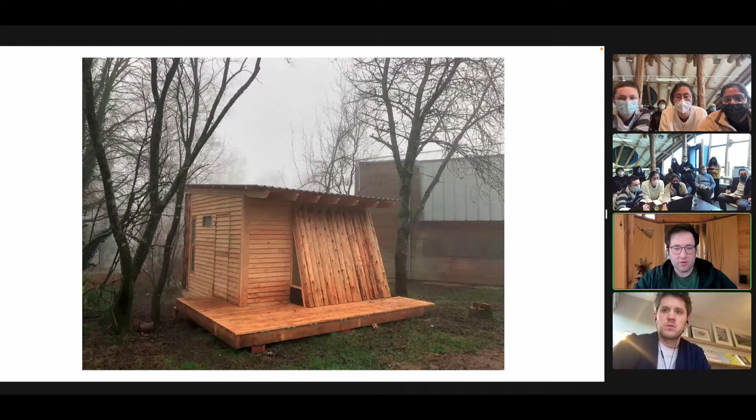We'd like to invite those of you joining us digitally to the place we have called home for the last year, the forest of Hooke Park. We'll be presenting yet another house of sorts that we built inside the campus. We'll begin by giving you an overview of the project, explaining our brief for a house and the systems we constructed in response. We'll then share a bit about the context for building houses that we've placed our project within, and of course, the forest.

We'll explain the major moments that influenced how these systems came to be, and then show just how we did it, accompanied by some videos of our process. We'd like to use this presentation to immerse you in our year designing a house from the forest, in the forest.

We received our brief one year ago to design a house from timber that specifically considers the commercial market. The intent was not so much a one-off bespoke assembly, but a consideration of the production of houses at large, rooted in the energy production as well as use, considering aspects of labor, economy, environment, and health.

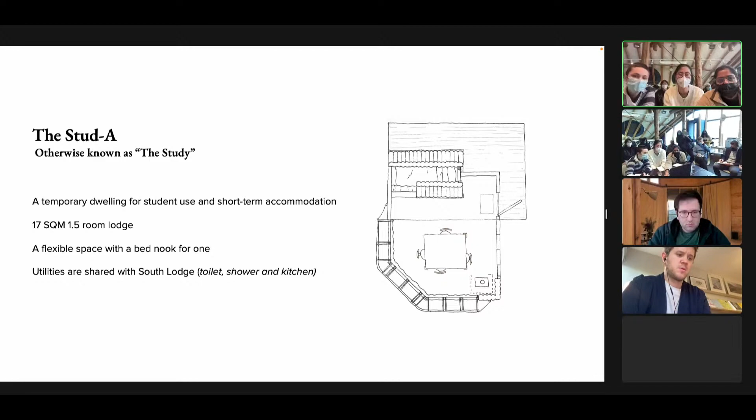The name Stud A is a play on the systems we've developed, an A-frame and studs, but it's also a gesture to its future as a continual site of investigation, a temporary dwelling for occasional short-term visitors, as well as a central campus shelter for daily studies.

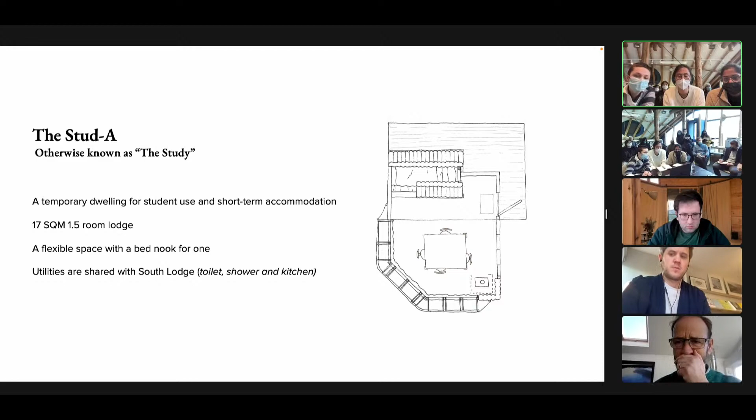The study is a 1.5 house of sorts with a cozy bed nook to sleep one. Utilities are shared with the neighbors in South Lodge, and as such, staying here is meant to be an experience that builds on community. We invite those spending time here to immerse themselves in the neighborhood of other student-made houses. We see the sharing of utilities as a catalyst for sharing and spending time together.

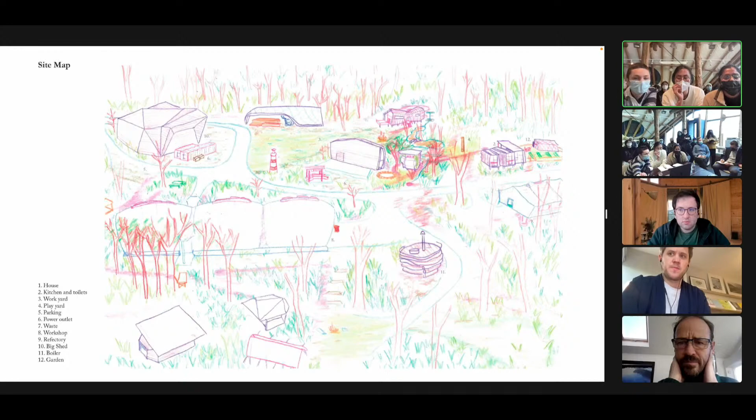The study is a house that synthesizes two unique systems that we each saw merit in their own right. The first, the core, is a mass timber assembly which provides a sheltered sleeping space in an A-frame and global structural stiffness. In balance with this is the Stud Plus, a light timber frame assembly that takes its explorations in the performance of the envelope.

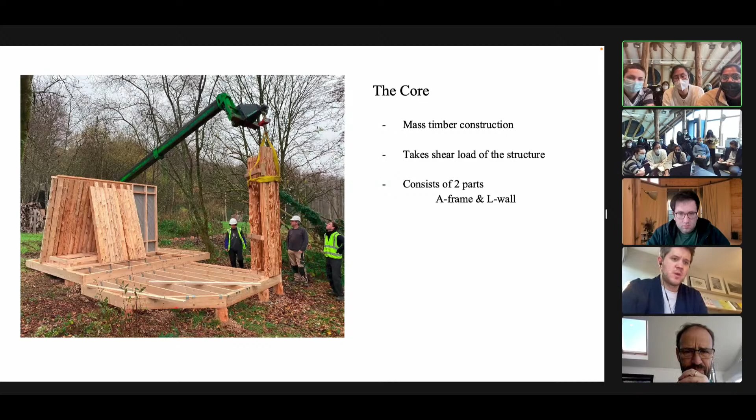The first system we're introducing is the core. The system is a mass assembly system that consists of two parts, being the A-frame and the L corner wall. These two systems are placed at opposite ends of the structure, resisting it in shear load. The core walls are an assembly of round timber procured from the forest. The A-frame was built using a cedar stack put aside to be wood chip, and the L corner wall was built with Douglas fir.

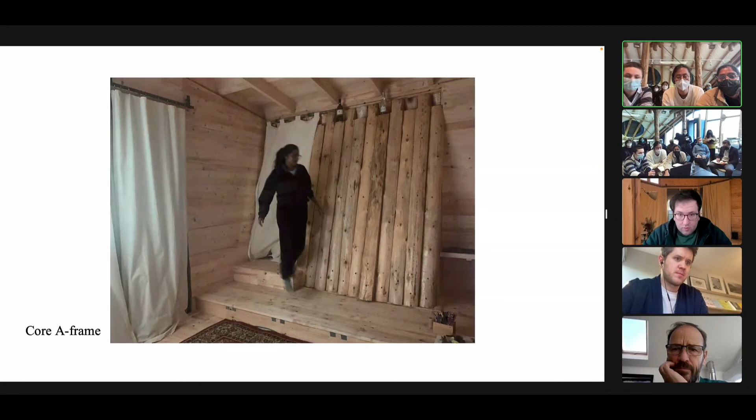The first half of the core system, the A-frame, is a bed nook. Taking advantage that the timber is a good thermal insulator, we decided to have the bed nook in it. The space inside is small enough to be about the size of a single-person tent, allowing it to capture body heat, and the triangular structure also provides less surface area, resulting in less loss of heat.

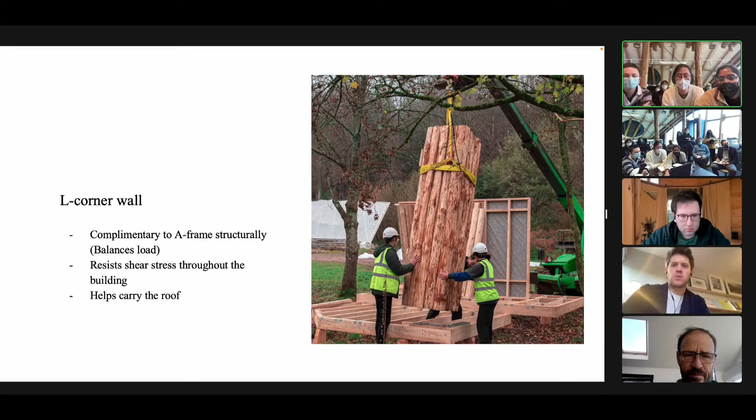The L wall, the second half of the core system, provides the balance with the A-frame within the whole structure. Its major role is to resist the shear load and also help carry the roof.

The Stud Plus is an additive take on its predecessor, the stud frame, also called light timber frame. It consists of two subsystems, one of framing and one of the envelope. Elements of the Stud Plus latch on the basic components of a more conventional stud frame.

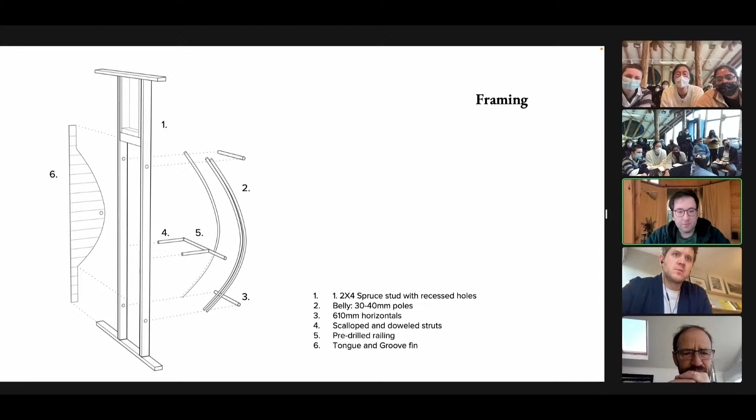The load-bearing structure itself was admittedly not ambitious, cut, finished, and assembled in 2 days by 2 people. But in seeking to address a need for commercial housing, we found the system a compellingly efficient use of time and material, so long as we promise to respect the forest in our design.

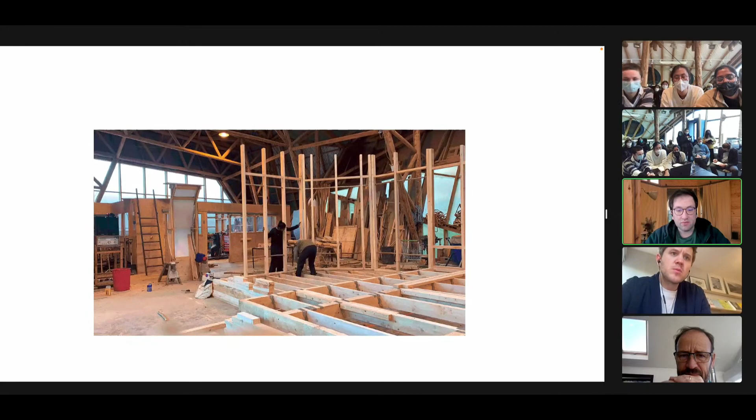The coppice is connected to the studs, avoiding the use of any metal joinery to increase the potential reuse value of each stud after the life of the building is complete. We used beech dowels combined with scalloping for the struts and lashing to fix the poles to the coppice struts.

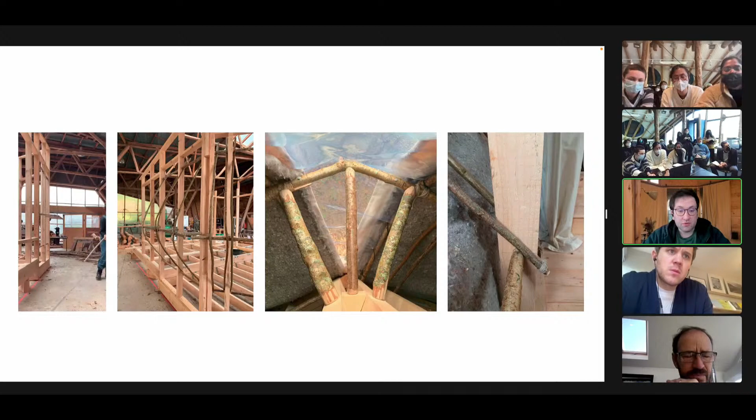We decided that the most effective way to clad the irregular geometry given by the use of coppice would have been a textile membrane. To increase the insulation value of the wall, a carpet underlay is sewn to the canvas following a mode similar to that of a yurt.

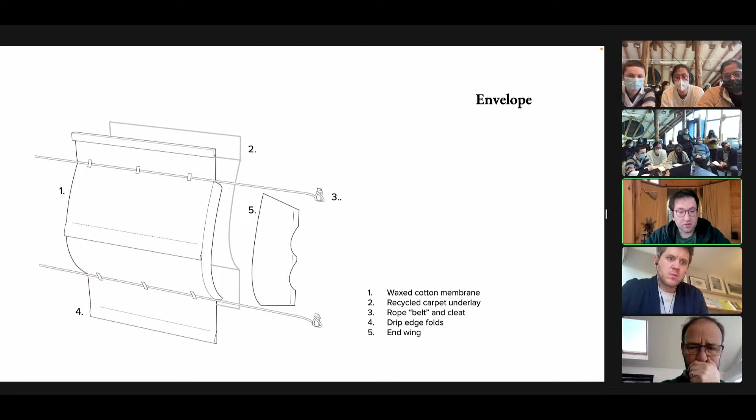Resolving the detailing of edges proved to be one of the most challenging aspects of the design of the Stud Plus envelope. Through the use of toggles and details borrowed from sailmaking, we resolved the seams with a rigid structure. To facilitate the shedding of water, a drip edge was achieved by sewing a flap halfway through the curvature of the wall.

The cabin is an emergent system in which the whole is greater than the sum of its parts. Though these two systems originated through separate beginnings, we quickly discovered that in conjunction, they solved many of each other's problems. The core provides a stable microclimate through scarcely processed roundwood, but using this assembly for the entire envelope would be an excessive use of timber and its performance.

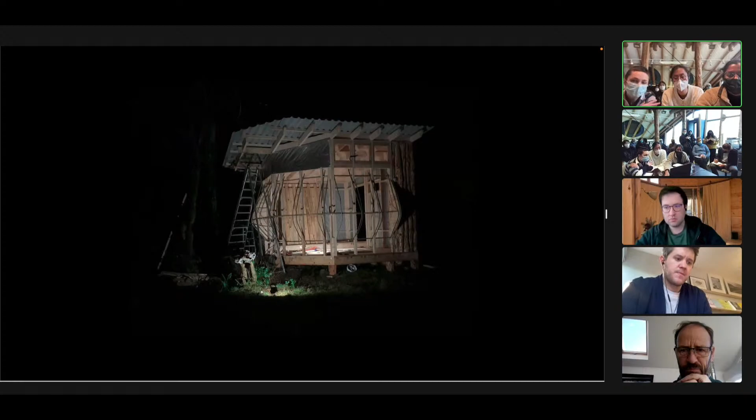So we've prepared this video to kind of put you into our house.

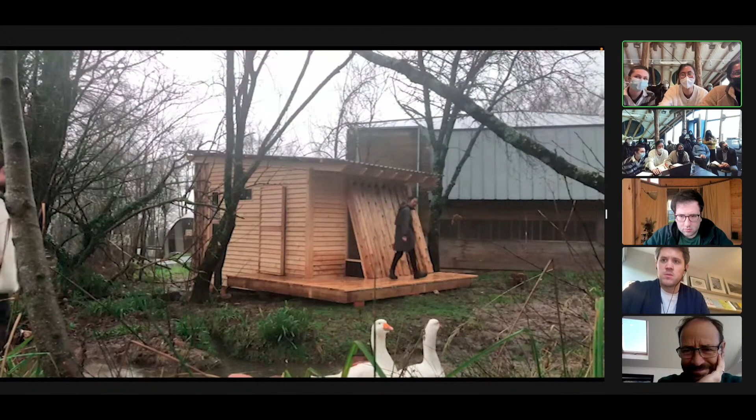In designing a home that would be applicable to the commercial market, we situated our brief in the current state of building and environment. The construction industry is responsible for nearly half of global carbon emissions, and half of that is just from heating buildings. While we have a great need to provide homes, we recognize the impacts that this has in contributing to waste and in importation of timber, where our ecosystems seem to bear the greatest burden of commercial supply chains.

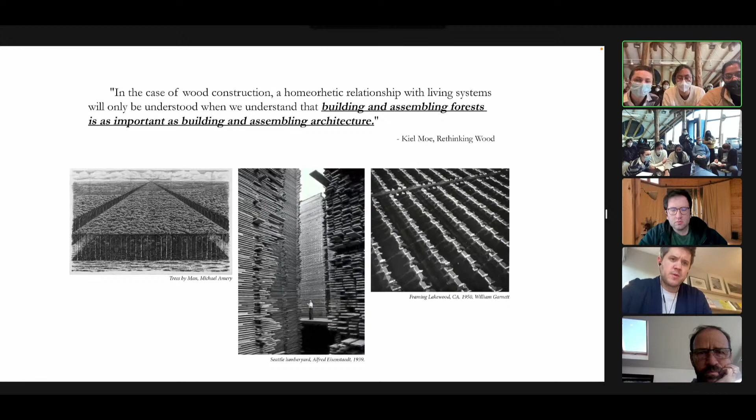We sought to not just design a house from the forest, but with the forest, considering how our systems might generate reciprocally beneficial relationships to the future of productive landscapes.

Our initial design research at the beginning of this journey tried to survey the different timber construction systems through a series of 4 case studies. The research encompassed a broad timescale, going from the Neolithic to some of the most recent developments. 4 categories emerged from the vast set of buildings we considered, each defined by a central structural approach.

We extracted one takeaway from each of these 4 cases. The indigenous longhouse from the tribes of the Amazon basin showed us a way in which you can build using a variety of species and interacting more fully with the forest.

The heavy frame, the barn, proved a different way to use joinery without metal fixings. The radical simplicity of the light frame proved the power of an open-ended and flexible system, and the mass timber showed us the true insulative potential of wood.

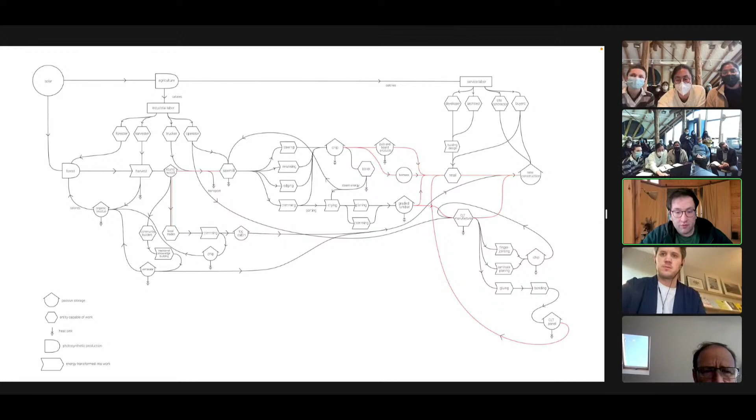The initial research phase allowed us to complete a map of a broader network of systems inside which a building exists. We tried to determine the flow of energy, both in terms of matter, carbon, and heat, that flow through the production of a timber house, trying to find which part could offer us the best opportunities to intervene.

Now I will introduce our forest. This is Hook Park, a forest of 17 species, which were planted into a compartment in 1950. In 2020, a compartment of spruce was clear-felled to produce a surplus of sawn timber beams. As a warm-up project to our program, we stacked these beams in a self-seasoning shelter.

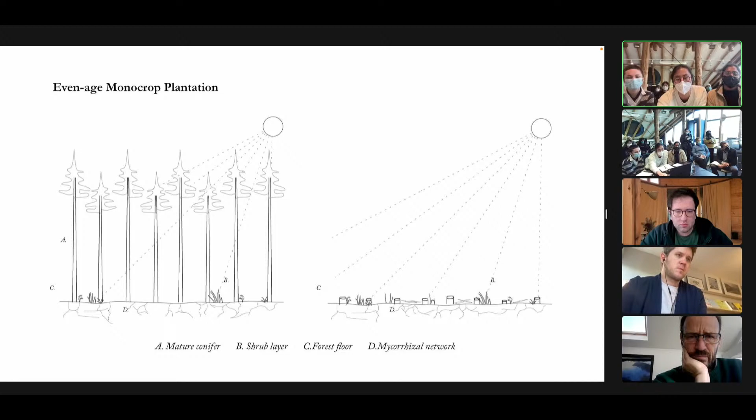This practice of clear felling is common in monocrop plantations, the kind of forestry management most often used for timber production. However, we recognize that these constructed landscapes privilege the profit of the forest, and by doing that, these forests suffer from a lack in biodiversity and resilience.

Coppice is a form of woodland management that takes advantage of most broadleaves' ability to re-sprout when cut. It makes up the understory of irregular forestry management, otherwise known as continuous cover forestry. We see this form of management as a complex, resilient, and biodiverse practice.

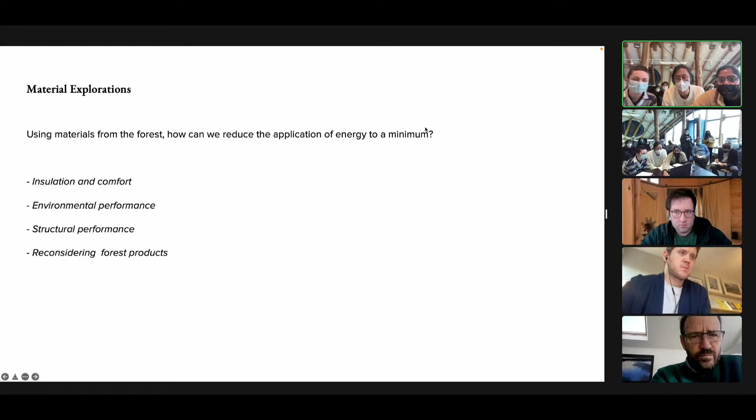And so in our building, we use this as a driver of materials. Using forest products as our material palette, we aim to produce prototypes using minimal application of energy. We took measurements depending on their insulative properties, environmental performance, structural performance, and finally reconsidering them as a forest product.

We experimented with neglected forest products, coppice and cedar bark, which are abundant in Hook Park. Seeing as coppice has a low economic value, we considered how to use it en masse as an insulative assembly.

The bark being so light yet fibrous, and looking at its history of use by the indigenous people of the Northwest, we considered it as a cladding material.

We produced mass and light assemblies majorly using coppice of various diameters. The mass assembly required excessive processing, while the light assemblies experimented with the flexibility of coppice.

Using the prototypes we wanted to continue exploring, we built an A-frame structure consisting of 3 different panels, each of 3 different properties.

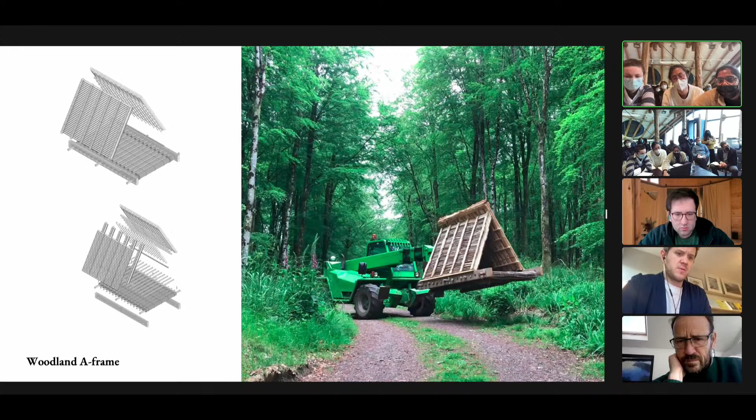Having learned from our research and hands-on investigation, we returned to our manifesto to begin designing potential systems. At this point, we'd like to take you through the origins and key moments in the development of our systems.

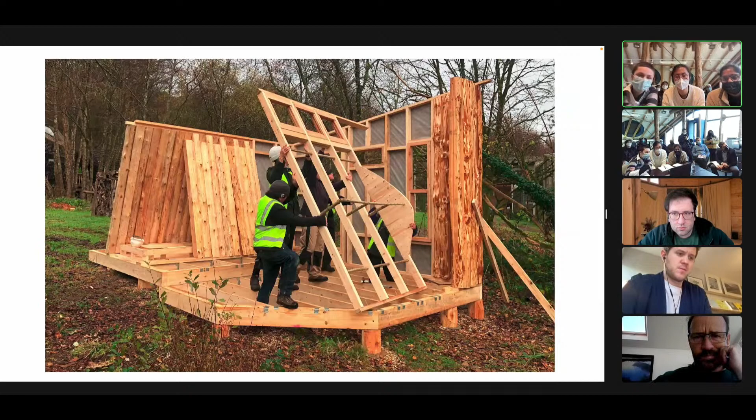First, why we built a stud frame in Hook Park. The light timber frame was first used in the early 19th century in what's called the balloon frame, and it hasn't changed much since. It's an open source assembly logic, and it's easy to follow, kind to low-skilled self-builders, and easily modified with just a few power tools and a pair of hands.

It's an incredibly efficient use of timber, needing only 15 trees for a single house, whereas a CLT house of the same size would require 3 times as much. Efficient as it is, the production of the 2x4 in respective houses has given way to economies of scale, implicating our most intimate spaces in mass commodity production.

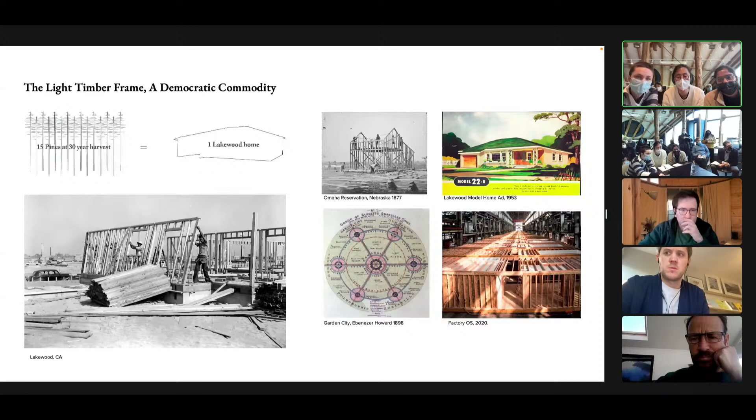Having lived in a stud frame suburbia all my life, I found it troubling that architectural education and the discipline at large are typically dismissive of the light timber frame. Familiar, elusive, and ominous, this case study helped to unravel the pervasive black box light timber frame industry which proliferates the residential landscape.

But perhaps the most alarming commodification in the system is that of the forest, where monoculture plantations are routinely cleared, with the only consideration being financial yield of its woody stuff called timber. In this way, the 2x4 becomes only a product at the end of a long supply chain, its origins from the potentially exuberant forest it grew from completely abstracted.

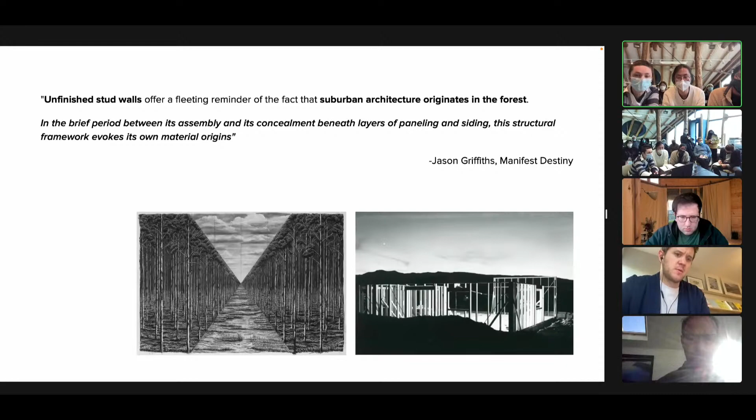Testing the system against our manifesto, it was not only an abstraction in how we build houses from forests, but also the lived experience in a house from a forest.

Virtually no timber is exposed here, and flat textured sheet goods conceal its innards of still air insulation. This points to what Kiel Moe refers to as an epistemological error by thoughtlessly deploying insulation as isolation, as though it were ever possible to truly isolate a building envelope from its dynamic environment.

The approach to Stud Plus is twofold: first, to make a stud with more depth to it, metaphorically and literally; second, to eliminate the need for plywood, exposing and celebrating the moments of the forest within this building. We aim to hijack the strength of the system while freeing it from its constraints.

True to the plus in its name, the development of the system was additive. We'll share some of the key moments that led to what we built, both failures and promises.

The first prototype was a crude assembly of green willow bent onto an L-shaped 2x4. The most interesting thing was the strawberry hue the willow turned when debarked, for a reason we never confirmed. The diameter of the willow was, however, too thick, bending the stud beyond structural use.

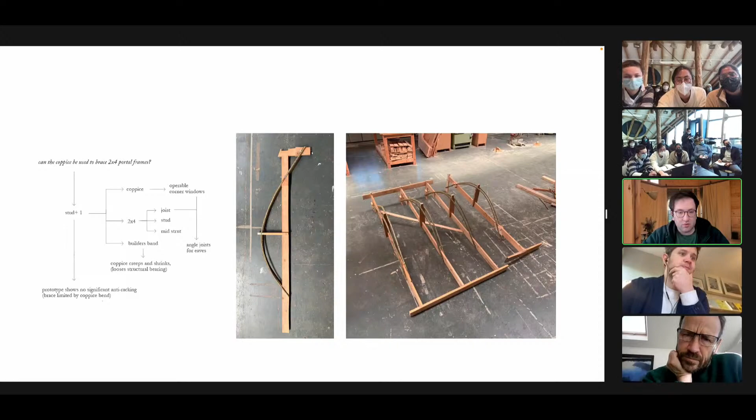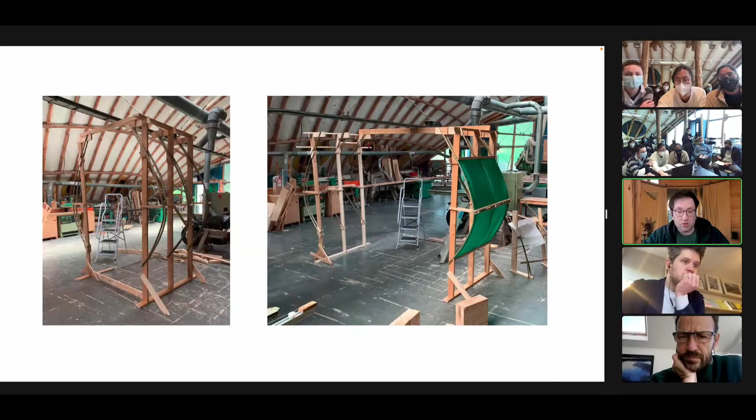The next iteration deployed two smaller hazel poles, which were much more pliable. We established strut and joist components as members to capture the hazel, testing panels as portal frames to see if a brace could offer racking resistance. Things were still pretty wobbly. With these panels built, we spanned a membrane across and understood how the tolerance of the coppice would perform, which was fairly promising.

Seeing a number of ways forward in the system, we looked to well-known housing types to imagine how it could be applied. Having assembled panels at this stage, we considered how a manufacturer would play into the supply chain to be both efficient and rooted in the forest.

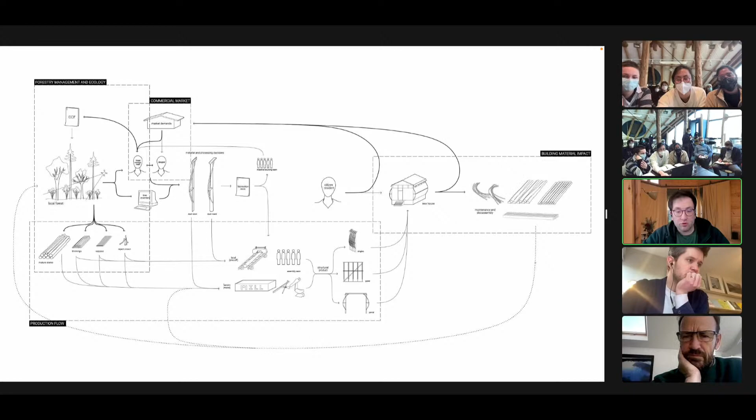We proposed a logic for a local supply chain that would more directly connect builders with the forester and eventual occupants. Since commercial markets fluctuate, we wanted to design a system less focused on mass production, considering times of lower demand.

We developed a more carefully crafted version of the Stud Plus using half-sawn and thin round studs. The prototypes were promising but would have required greater section for structural use, meaning cutting down more trees with a less efficient yield than the energy required to harvest one large tree.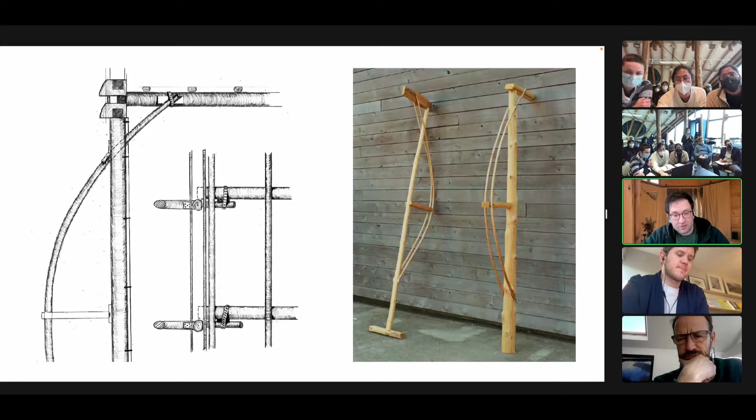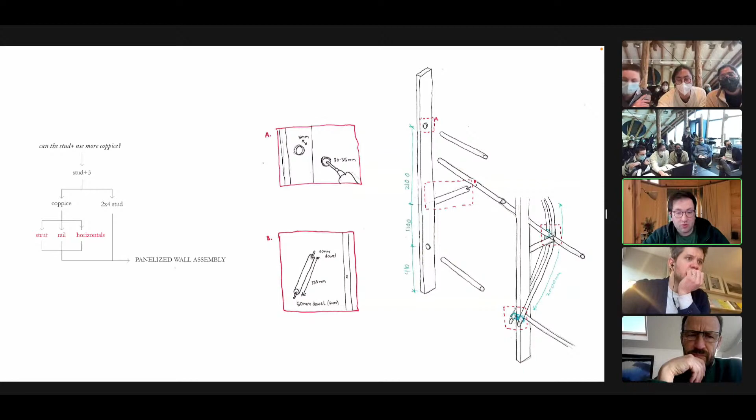We decided to keep 2x4 studs but employ greater use of coppice where possible. We replaced the top joist with coppice horizontals between the studs to catch the ends of the belly pole, and replaced the sawn struts with scalloped, doweled coppice struts to carry the rail.

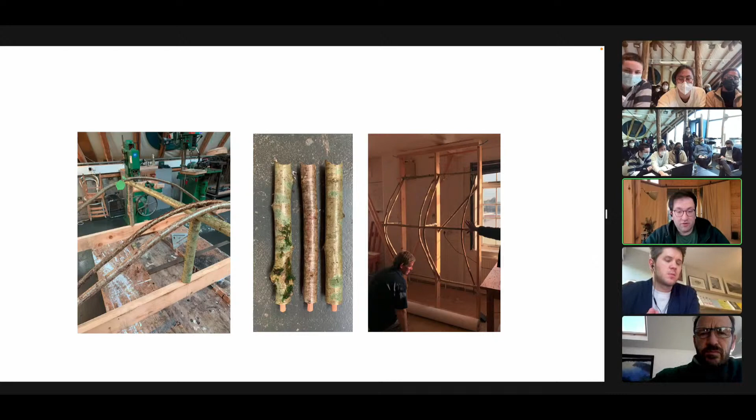This allowed the belly pole to be bent green within a panel, taking advantage of its springiness to hold it in place. This move eliminated all the hardware from earlier versions, drastically reducing its embodied energy.

Thinking about the energy performance of the system once built, we speculated that this rotund exterior could act like a greenhouse, maximizing solar heat gain as the sun's angle of incidence would always hit perpendicular to the surface. A venting system was proposed at the top of the interior surface to manage heat depending on climate needs.

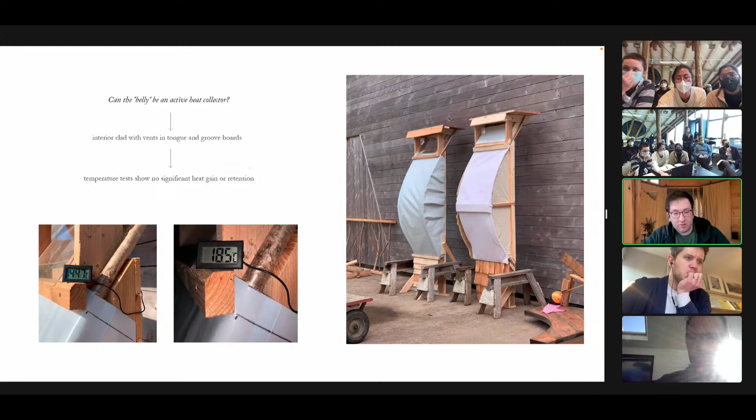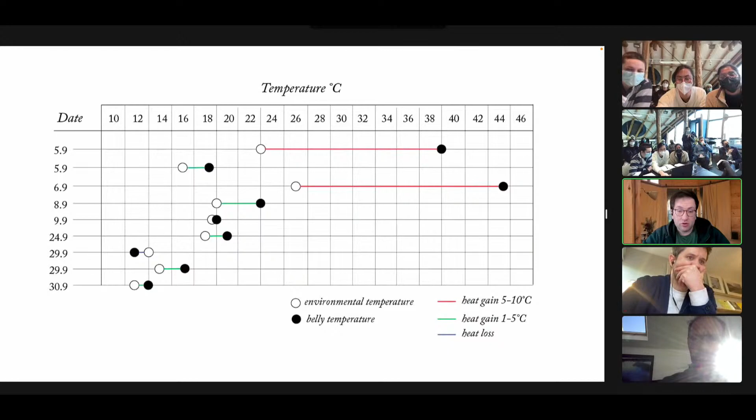We produced two single-bay prototypes backed with tongue and groove boards to test our heat gain hypothesis, one with a natural cotton membrane and the other with a spare plastic membrane from TESS. The prototypes got hot all right, but only to the point of overheating when the weather was already too warm for additional gain. For the most part, heat gain was negligible on overcast days, and the interior was even cooler than the environment on one cold, wet night.

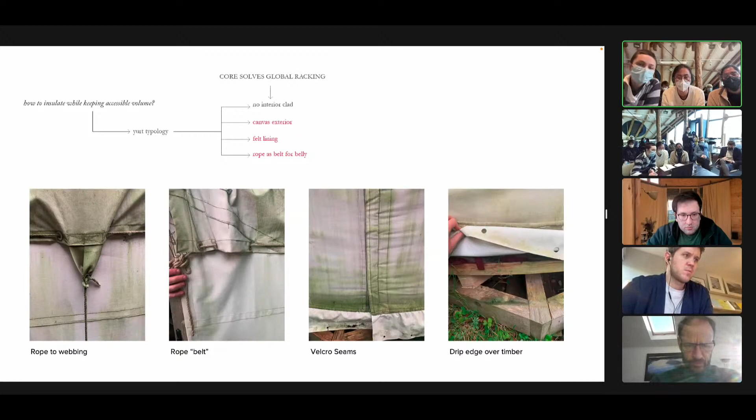We looked to Tia's cook and neighbor in the forest's backyard yurt as an inspiration, analyzing it as a promising reference for cool weather membranes, with a wax cotton exterior and felt lining on the inside. Simple details like a drip edge, Velcro seams, and a rope that acts like a belt to tighten the whole membrane were noted for the redevelopment.

But Tia shared that the difficulty of a yurt was that it didn't offer good ventilation. This prompted a pursuit of an envelope in layers that could adapt to its environment, further celebrating the energetic and experiential exchanges. Around this time, we began to synthesize the benefits that the Stud Plus and core could provide each other.

This was a major moment in resolving the whole design, allowing the Stud Plus to remain unclad, drastically reducing timber requirements for boarding and exposing the structure itself.

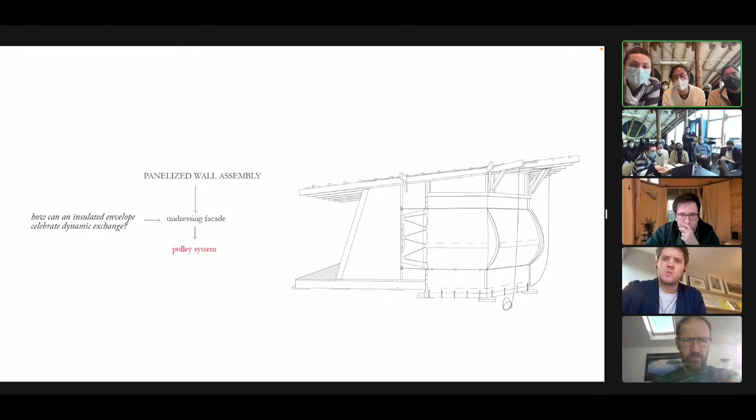We came to a design for the membrane called the Undressing Facade, using two pulleys to lift one of the panels up and reveal the structure below.

While this mechanism offered more than sufficient ventilation on hot and stuffy days, the undressing would also allow users to fully transform their space from private shelter to a public venue or deck when they wanted. In this way, the building listens to the user's needs while requiring very little energy to adjust to changing climatic needs.

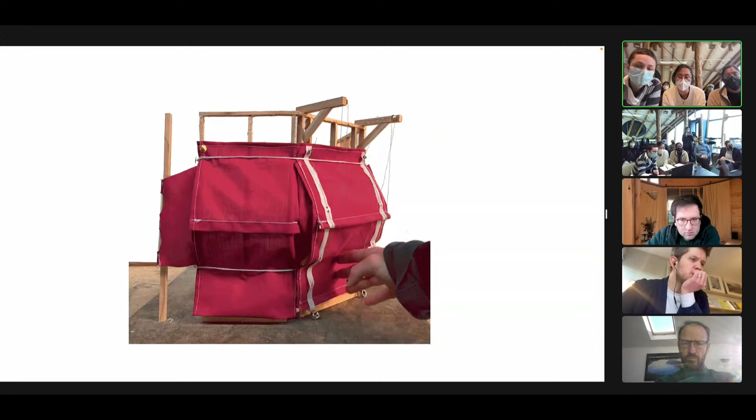One challenge in the system was designing all the seams and joints to serve their purpose at the lowest means possible.

It seemed like there were 100 different ways to do one detail with the fabric, so we decided to reach out to the Boat Building Academy in Lyme Regis for a sailmaking course. For 3 days, we all worked together to test different cladding options on a scale model and a one-to-one prototype.

Special thanks to Mark, our tutor, for the many useful tips. This course was really helpful in that it allowed all of us to rapidly prototype on the same thing at once, a nice change from working on our own focuses throughout the year. We learned the basics of sewing and how to scribe onto structures, and decided on a sustainable source for canvas.

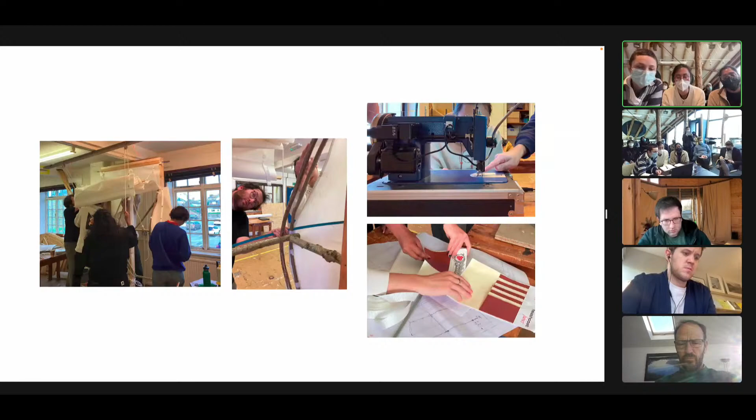By the end, we developed a taxonomy of necessary accessories consisting of rope, webbing, grommets, and Velcro. A cloth template was derived from our 3D model to account for the curvatures, with additional tailoring done on the structure. The production of the membrane itself was relatively straightforward and completed in just over a week, with support to feed the bulky material through.

But not all of the Stud Plus was, however, plus. Some of it was just stud. So to clad that area, we returned to the early prototypes of bark ply to provide shingles for cladding. This is done by gluing two cuts of bark on their inner surface and compressing them together with a hydraulic press.

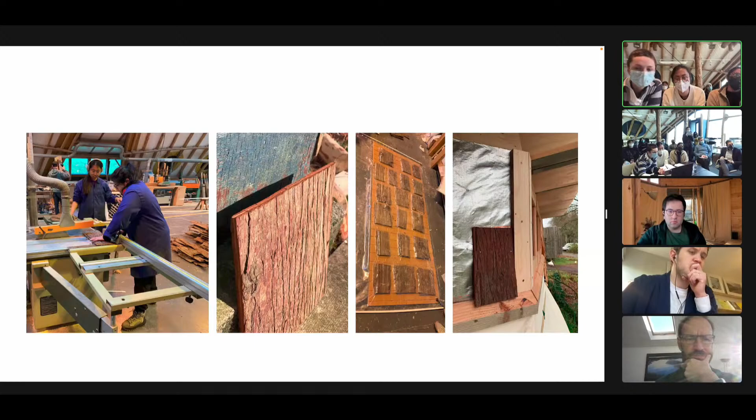At this point, the development of the Stud Plus has blended into its construction phase. Over the year, we worked as a group to split our efforts amongst these systems, and adjacent to this development was that of the core.

As mentioned in our brief, we will build a temporary building. There's no heating and power system. We want to use mass timber to create a stable environment, but blindly using CLT will require lots of forest resource, so we were trying to find some other assembly to do it.

CLT always requires lots of sawn timber. In order to save the forest, we are trying to use coppiced wood to make a panel that could have similar performance to CLT. Because the wood has random shapes, it's quite hard to process. Even though we made lots of jigs to help us, it's still going to take lots of time to make.

I made over 600 wood bricks with hazel, and each of them needs 5 steps. Also, because the processing is complex, it's hard to make everything accurate enough for the final assembly. So we don't think it's a good way to do it.

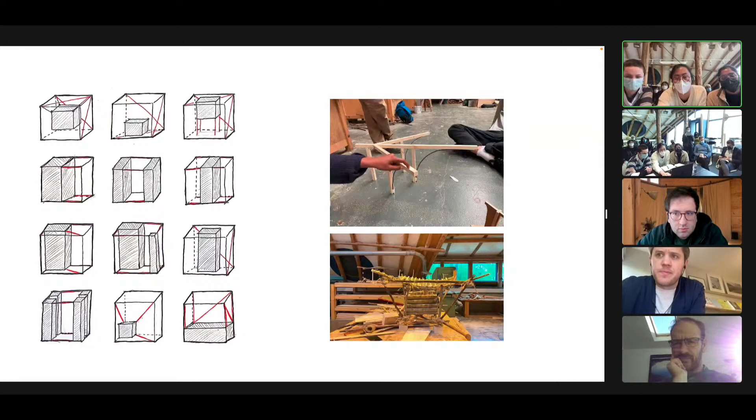After that, we changed our mind to use less material to create a limited space in the building. If the space volume is small enough, it could still save lots of material. There's a saying in China, 好钢用在刀刃上 - it means good materials should go to the right place.

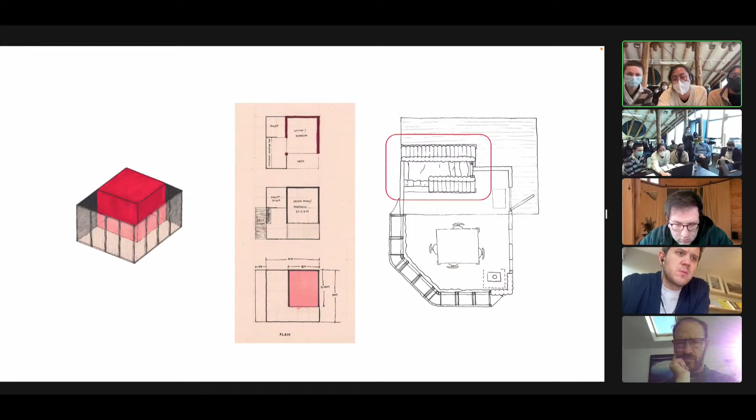Of all the activities that might happen in our building, sleeping must be the most in need of a stable environment. After that, we decided to use high density material to create a small bedroom. For the rest of the activities, we could use light framing, where the material is not as intense.

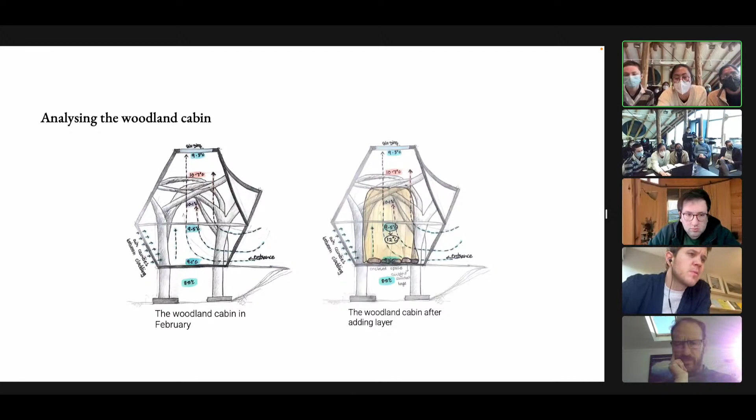Then we all went to the woodland cabin, which also has no heating system. We made a curtain tent and slept in there. Actually, our body heat warmed the tent quite fast, and it made a big difference from the outside.

We also recorded the temperature changing on the surfaces. This diagram shows that the surface temperature rises 2 to 3 degrees after staying in there for 3 minutes.

As for the material choosing, we also chose not to use general CLT to build the core, since the CLT panel would waste a lot of material. Using round wood could be more friendly to the forest. We could also manufacture almost everything using only hand tools, except for a Wood-Mizer we do have.

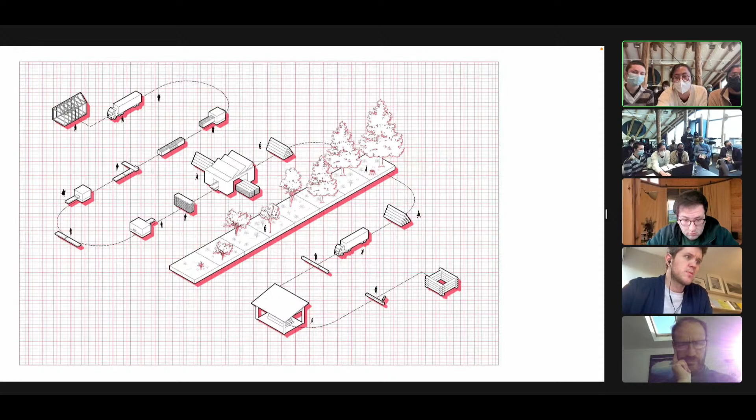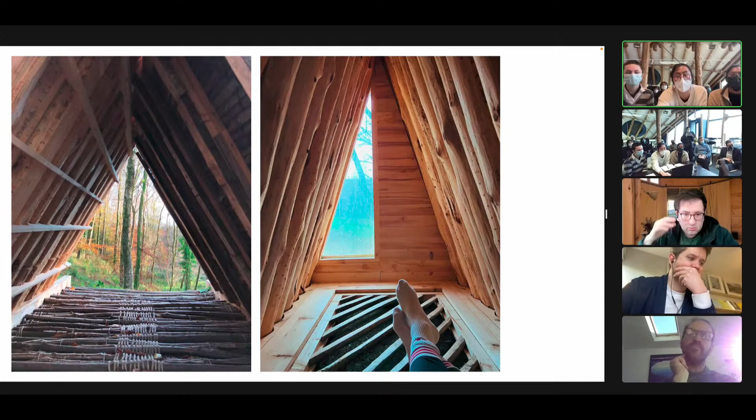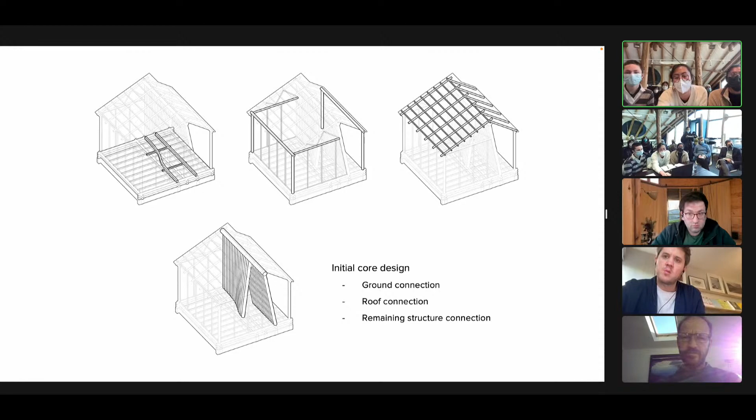In addition to creating a warm bedroom, we wanted the solid wall to make the whole structure more stiff. The A-frame structure we built before shows us it's quite stable, and the spacing there made us excited. Initially, we wanted to extend both sides of the A-frame wall and curve it to carry most of the shearing force from the stud walls and the roof, then transfer it directly to the foundation to make the whole structure stable.

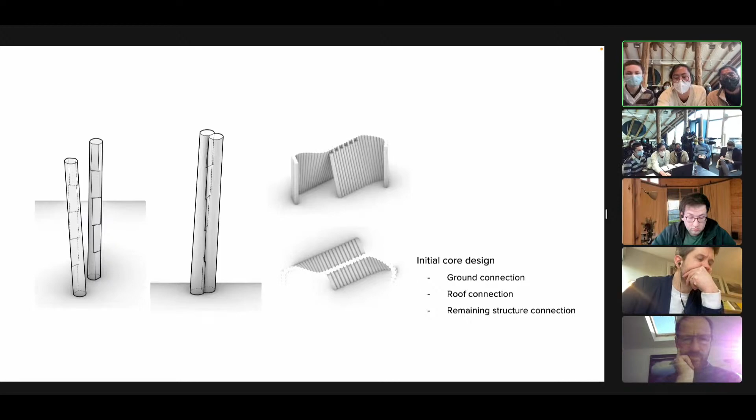In order to use round wood to build a curved wall, we designed a T-joint. These flat surfaces fit with each other, and the shoulder could carry most of the shearing force. But then we found the same problem as when we were making the coppiced bricks: it's very hard to make a jig strong enough to hold these heavy logs without shaking, because we cannot make the T-joint accurate enough, so it will never fit together perfectly.

From our prototypes, we decided against the curve within the A-frame and instead introduced the L corner log to the far opposite end of the structure. These two assemblies worked really well with each other, strongly supporting the entire structure in shear.

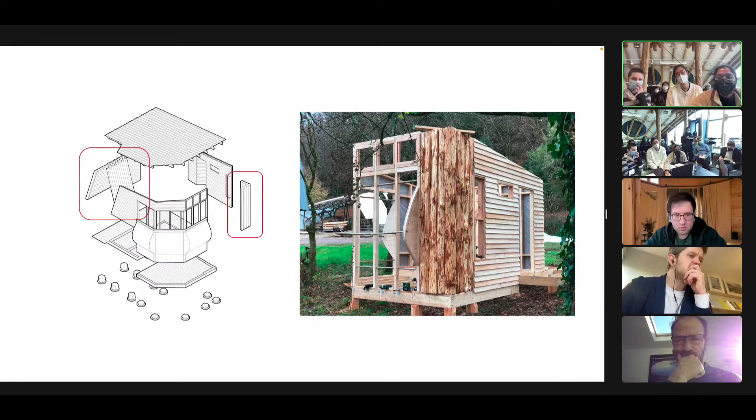This design also allowed us to eliminate the use of 60 logs, which a previous design required. Instead, we used 38 logs. Although 38 sounds reasonable in comparison to 60, it still required us to fell a minimum of 15 trees, which broke ours and Chris's heart.

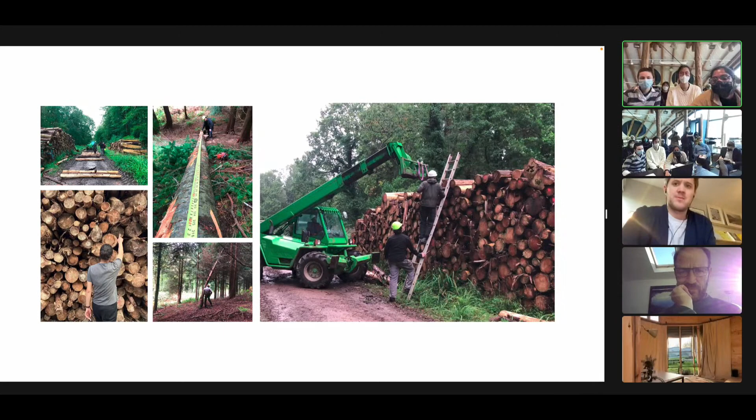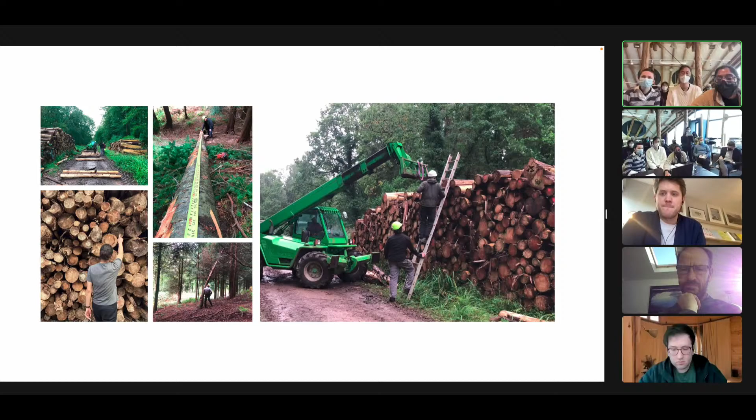But conveniently, we found a large stack of cedar ready to turn to wood chip. We acquired all the timber for the A-frame from this stack, but they weren't long enough for the corner wall that needed to support the higher end of the roof. So instead, we harvested 3 Douglas fir trees, acquiring 9 logs.

Because the cedar logs were left outside to dry for a long period of time, their outermost layer was rotten, requiring us to remove about a centimeter deep layer. But because we were using timber in the round, it was structurally stable.

The logs that went into the core were of 3 different types. Type 1, where the entire log only has parallel faces on either end, being the extended inclined wall and the L corner wall. Type 2, the log within the A-frame with the dovetail cut, and type 3 that connects to the dovetail cut.

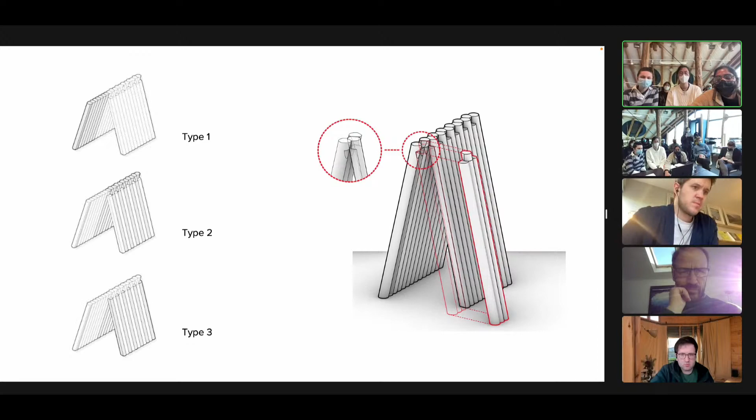While type 1 and 2 only took 3 days to produce, the dovetail logs alone took about 3 full weeks. The production of the dovetail logs started from the sawmill and were later worked on manually.

Most of the tools used in the production of the logs, other than the mitre saw, were a skill saw, handsaw, the widest chisels, and a mallet. The grooves within the logs required the use of a router. We also used a crosshair laser to achieve accurate cuts.

Although working with round timber was quite complicated, especially with the quantity that we required, the flats made by the mitre were a convenient datum for all our measurements.

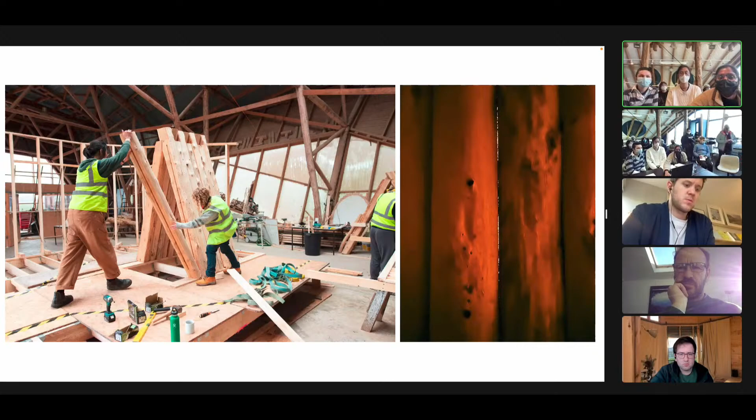The tongues were only placed within the logs that were exposed to the exterior atmosphere, sealing any gaps that could form over time. The interior A-frame wall didn't require any, which allowed the bed nook to be able to breathe through into the common space of the cabin.

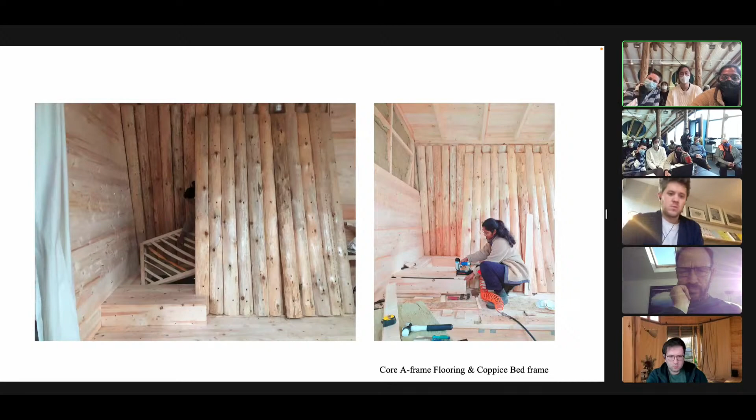The tongue and the grooves also helped majorly in positioning the log during construction. The flooring within the A-frame was made with sawn spruce, while the bed frame was built with coppice, trying to eliminate any excessive use of sawn timber wherever possible.

An insulative curtain was added to the A-frame such that the space inside could be sealed while sleeping, allowing the A-frame to capture body heat.

Next, we will be showing a video on the construction of the cabin.

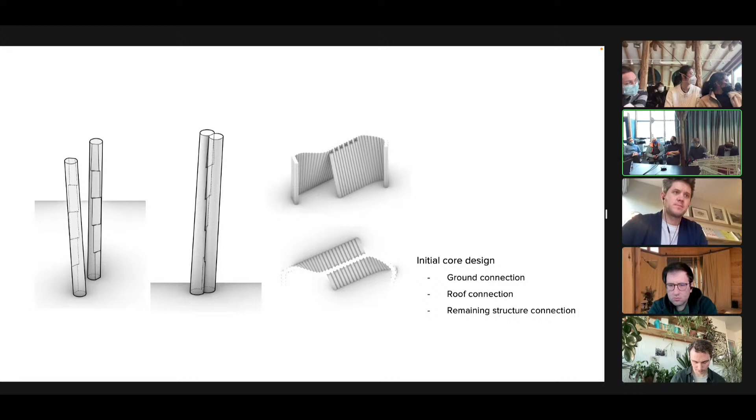As Martin mentioned, I think it's important that Dimitri followed up on that logic and developed the project more independently. So those observations will be really acute later this afternoon. I think it's like to move away from the technical as well, but I think the question of the space...

The stuff I was looking at in high school was things like Shelter and the Dome books, those counterculture era publications. I actually lost them all somehow, and a few months ago I bought a reprint of Shelter, curious as to what I think of it now, several decades later.